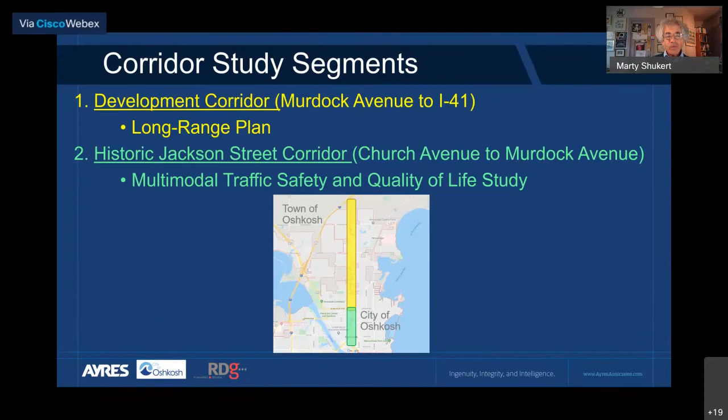In this study, we did a rather extensive level of discovery and economic analysis as well. As you know, the North Jackson Corridor is a real hybrid. It has two segments of significant development south of Packer, and then adjacent to the county park north of Snell, including the North Park neighborhoods. So we start out looking at existing land use. The areas in between, effectively north of County Road Y and between Packer and Snell, are really much more of a blank canvas right now. And a lot of the development ideas focus on those, whereas the built-up parts are a bit more incremental.

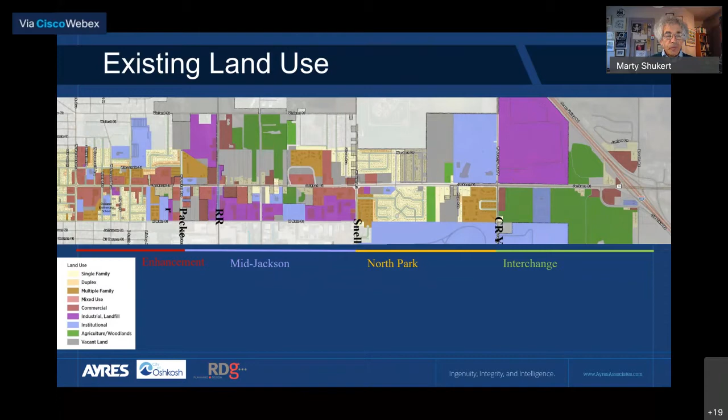Next slide, please. This simply shows the concepts included in the current 2018 comprehensive plan that identify these unbuilt or undeveloped areas, for the most part, that are not public facilities, as various kinds of mixed use. In other words, it's up to us to figure out what those mixed uses are. And so we get into a little bit more greater level of detail than that.

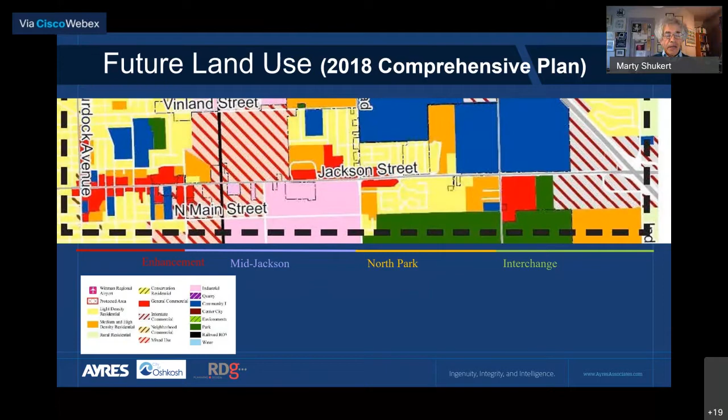Next slide. One of the components of the study included what we refer to as a visual listening or visual preference survey, where we showed people a series of images, cued what those images were about, and asked participants, of which we had about 150, to respond favorably or unfavorably about what they were seeing. These are the images that received the top ratings, and we can derive certain conclusions from these: a street character that includes landscaping and pedestrian or bicycle access, with a rather clean and multimodal look; the ability to get across streets relatively safely and easily; development character that is 2 and 3 story in scale, somewhat what we sometimes refer to as urban/suburban in scale, not strip commercial, but mixed uses; and a sense of gateways as well, of having urban design features that mark out specific places and areas along the corridor.

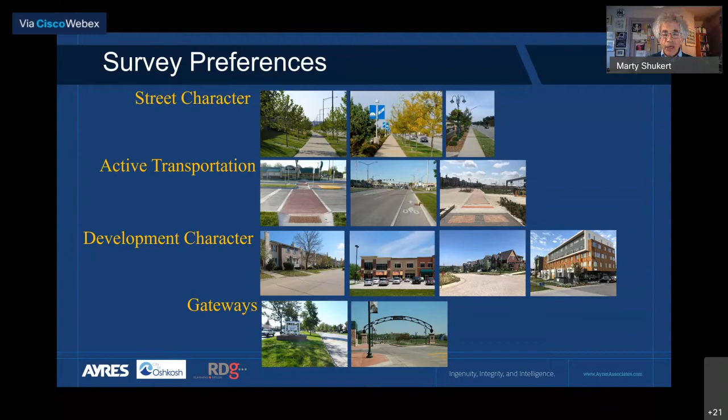So within the limitations of this kind of very long range plan, we tried to reflect these preferences in the overall concept. Next slide, please.

We're suggesting in this study, which does not rise to the level of the current RFQ that's out for a more complete housing study, that we will absorb or generate a need for about 150 to 160 units per year in the overall city over a 10-year period, and then we can project that onto a 20-year period as well. That's significant in terms of looking at the amount of housing that we're suggesting in the corridor and its consistency with what the markets are telling us.

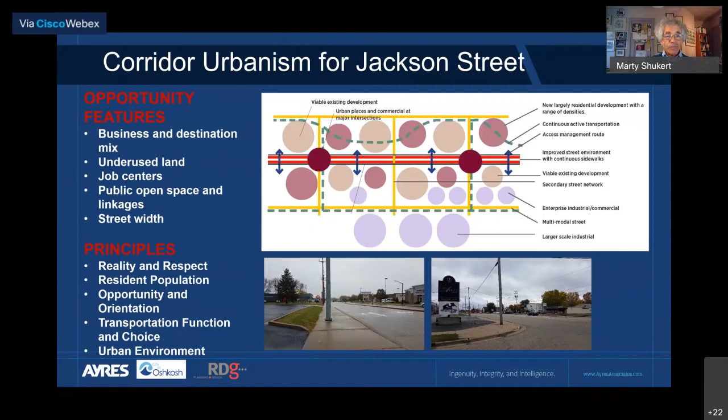So now we get into the planning itself, that there are certain trends that are leading us to conclusions. One is moderate population growth that will give us a city of about 74,000 within a 20-year time frame. A declining medium and long-term demand for commercial space. We really don't see the trends that we've experienced in retail reversing. And so commercial development in terms of the retail perspective is very much strategic and limited.

We have the distinctive presence of major job centers and industrial development along the eastern edge of our study area, evolving transportation preferences that include a growing demand for more sustainable transportation, as well as pedestrian access in local areas and bicycle access as well. And finally, an increased demand for greater land efficiency, for not wasting land on parking, for example, that's unnecessary, and trying to get the biggest bang for our buck of infrastructure and development as we possibly can.

Our strategies to deal with these include a good deal of residential mixing densities and mixing land uses horizontally rather than vertically. Many times people have been proposing residential development over commercial or retail, which is producing a lot of vacant retail space. We're suggesting a mixed use concept, but one that mixes uses horizontally and makes the relationship between commercial and residential development very permeable and organic.

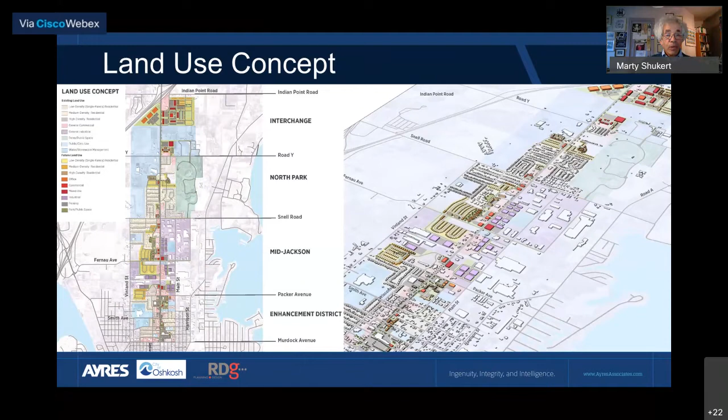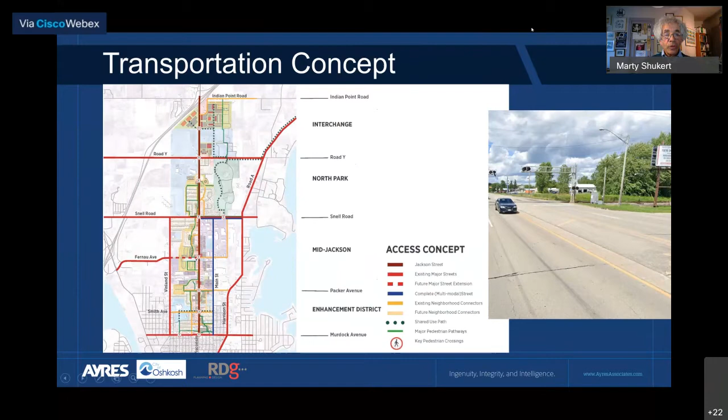Next slide, please. So now as we look in, this shows the overall transportation concept. We'll get into that on a segment by segment consideration.

You'll see in the document detailed plans both for transportation and land use that are annotated. We think a picture can be worth a lot of paragraphs and words that point the way to different ideas and recommendations along the corridor. The major land use features here are some infill residential development north of Fairacres Center and extending Packer Avenue to take advantage of some open land and residential possibilities.

There's a significant number of enhancement ideas that include an improved greenway and pedestrian way along the street, and better off-corridor bicycle connections as well, which you'll see in the next slide dealing with transportation improvements.

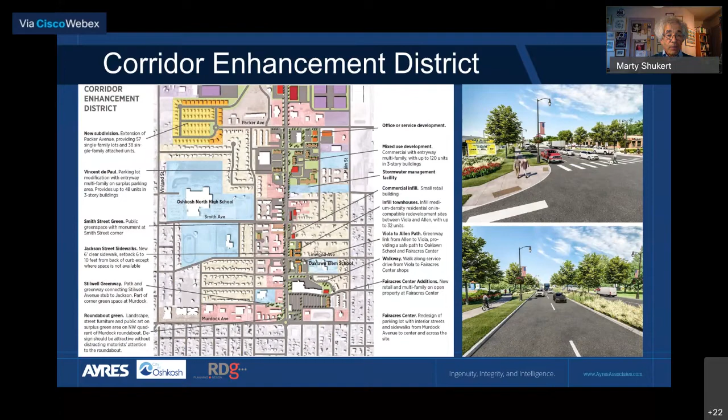We did a little bit closer look at Fairacres Center that provides ways of improving pedestrian and bicycle access into the center through interior streets. Right now, it's a little bit sketchy to walk through parking lots to get into the center, but there's better connectivity both to Murdock and to North Jackson, as well as to the neighborhoods to the north. That connectivity is a very important element of the entire scheme.

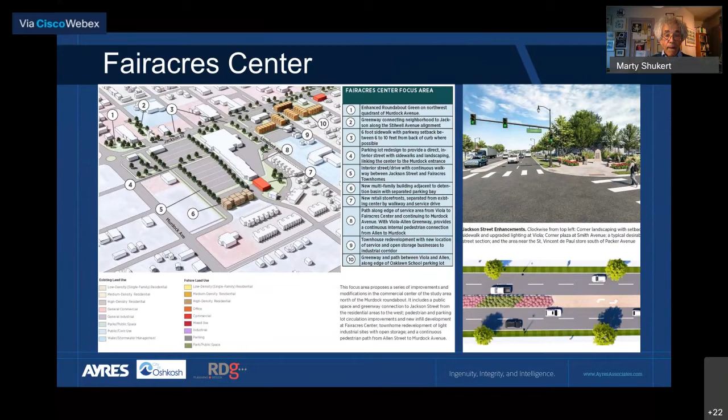The transportation concept focuses on better pedestrian facilities, both from the main bikeway corridor along Smith Avenue, and improved pedestrian crossings at Packer and Smith to the high school and to the west side of the street.

As well as improved sidewalks and pedestrian connectivity, both on the main corridor and off it along the Wisconsin Avenue alignment.

There's also some infill medium density housing on vacant sites and a greenway that helps to connect neighborhoods to Oaklawn School on the east side of the street. We're also proposing an eventual connection of Geneva Street that really helps connectivity and opens up some other industrial and business development opportunities between Main and North Jackson.

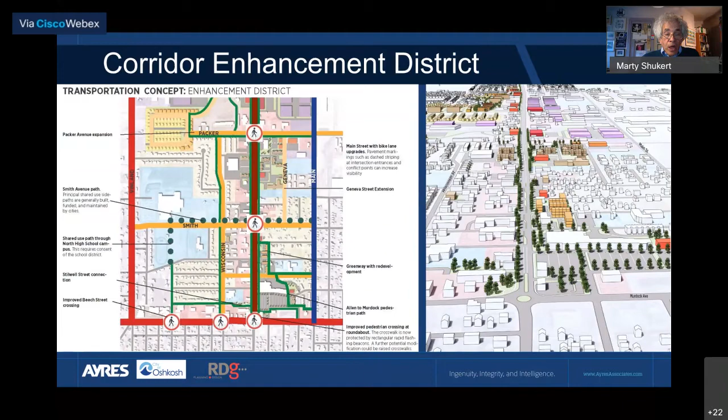Then, as we get to Mid-Jackson, the land use concept really gets to be very residential, with concepts for plats that we've laid out here. Not that people will necessarily build them exactly like this, but it presents ideas.

Some industrial and enterprise development along the railroad corridor, the extension of Fernau. Respect for the need for storm drainage and storm water management as well, and importantly, the development of connections that you'll see in the transportation concept.

You'll also see on the east side of Jackson that we are suggesting opportunities for smaller scale business startup and flex building uses. Again, complementing what's there, but providing a type of development that is often very much in demand, but not always very much accommodated within contemporary settings.

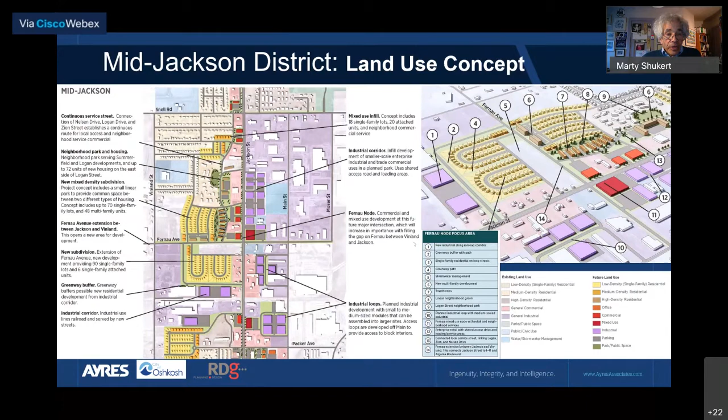You'll notice as well here in the transportation concept that supports this, the idea of using secondary access as well as pedestrian facilities along the main line of the street.

In this case, linking up the loose ends of Logan Drive to provide what's effectively a backage or rearage road between Snell and a mismarked Fernau Street that shouldn't say Snell and is actually corrected in the document.

That is a way of providing more comfortable local access that is multimodal and can be in a lot of ways more comfortable than trying to force pedestrian and bicycle traffic onto a major arterial. Main Street remains the primary north-south bikeway with its bike facilities.

And then through a better connection into the county park that is going to be online with the Snell Road project to be able to provide multimodality on the east side as well.

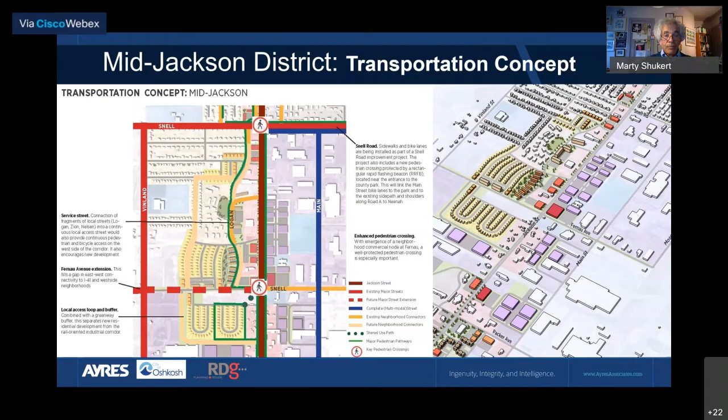So now we come to the North Park area where there are some residential infill opportunities, some service commercial, but the big news or big proposal here involves connectivity among neighborhoods and into Winnebago County Park.

This is probably a good point, because this is the last place where we have major residential development, to talk a little bit about how this is consistent with markets.

We're proposing an opportunity here at full build out, consider that to be 20 years or 2040 population, of a capacity of about 1,200 units, with a relatively even distribution of single family, medium density that is attached, townhouse, various kinds of medium density settings, and multifamily, adding up to about 1,200 units.

So that is effectively a third of the city's total housing demand over a 20-year period, which we think is a pretty reasonable number to assign to this specific amenity-rich development area.

So it's not all up here, but if we imagined about a third of the housing geography being developed along this North Oshkosh corridor, that feels about right and pretty consistent with what an overall housing and comprehensive plan for the city winds up showing.

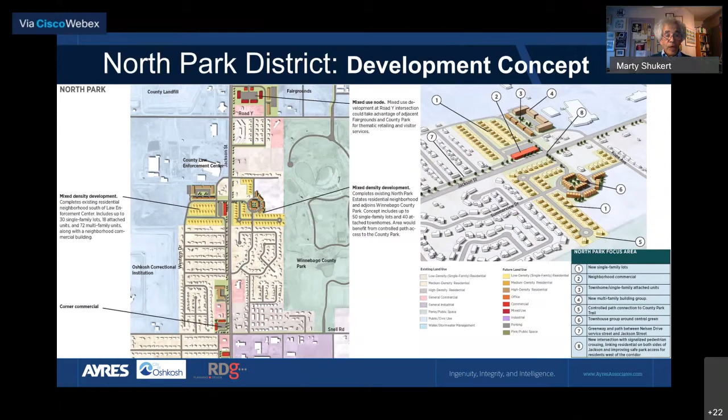So here you can see the extension of the secondary systems, as well as a significant central access into the county park with its trail and bike facilities completed between Snell and County Road Y, and then as a side path back over to the North Jackson main line.

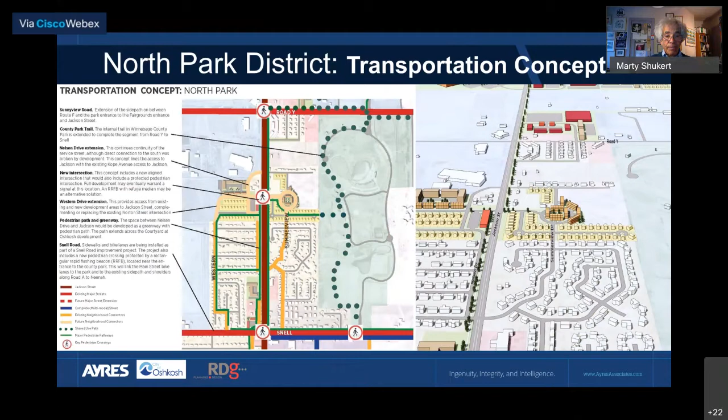Next slide. And then finally, we come to the concept for the I-41 interchange that envisions an office park and office related uses, lodging, assuming that someday we'll all be able to travel again.

I'm optimistic about that, and with that, commercial and office development surrounded again by new residential growth south of Indian Point that's designed to mix densities.

And to provide something that we think is significant, and we know the county did as well in our conversations with them, and that is shared use pathway connections to and through the county fairgrounds, where there are definitely strong visions of how to use that property in a more complete and year-round way.

The next slide will then show the transportation concept for this part of the corridor. So next slide, please. There we go.

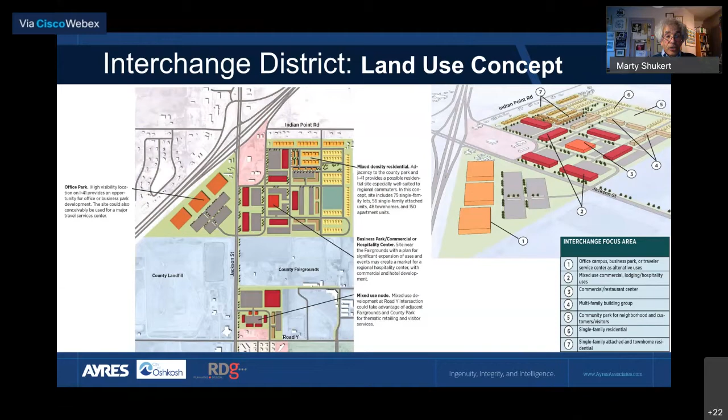So you can see the shared use path extending through the fairgrounds and then to the north as far as Indian Point, and pedestrian connectivity in this part of the development area as well.

So it is a long range vision, but we think one that is realistic, that looks at North Jackson in a contextual way. So with that, I will.

I think that's probably the last slide. We'll stop my monologue. It's a ton of material to put into 25 minutes, but hopefully I've done that well, and it will pique your interest in terms of looking at and reading through the final draft document that I know you all have access to. So with that, I'll stop and take any questions that you might have.

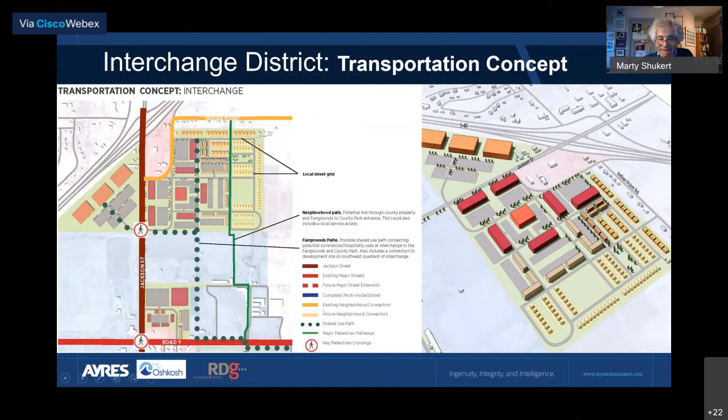But the short-term connections, within the next 5 years, involve the connection of Fernau from North Jackson to Vinland, the beginning of the corridor enhancement program, and beginning to fill some of the service road gaps farther north. We know there are projects like Snell Road that are online as well. The improvement of sidewalks and sidewalk continuity in the area south of Packer will also be a phase one or short-term improvement. So those are some of the ways to begin the project, dealing with the built-up areas, and then as development takes place and builds on that momentum, it moves off into the medium term as well.

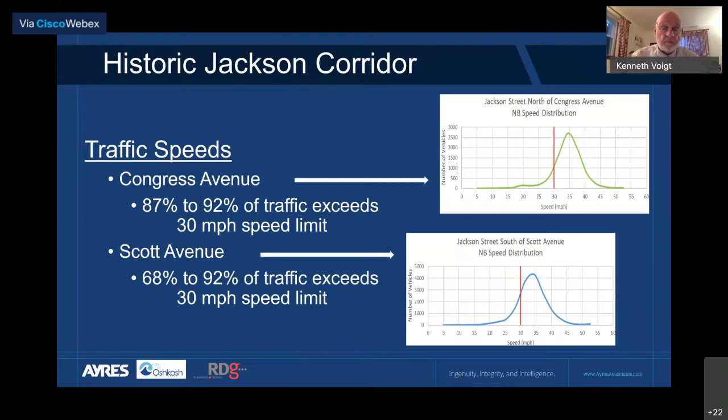Safety, a critical concern always, is what kind of crashes are there, collisions, and what the patterns are. 2016 was the highest year for crashes along this segment of the roadway. There were 75. The typical crash patterns, not really surprising with a 4-lane roadway, included left turns, some rear-end crashes as people stop to slow down and make a left or right turn. There's no turn bays for any of that, so cars can't get out of the way. And then just changing lanes or sideswiping cars in the adjacent lane.

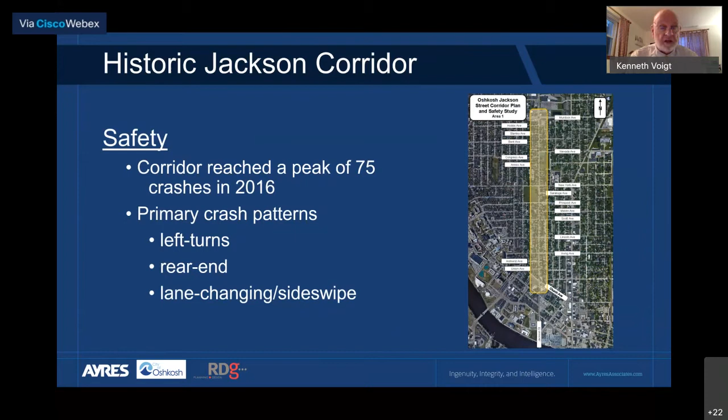The next slide shows the highest crash intersections. Murdock had 16 crashes per year, and we also show a rate there in parentheses, 1.56 per million entering vehicles at the intersection. I'll talk about that a little further. New York Avenue had 13 crashes per year, a rate of 2.04, the highest rate. And then Irving Avenue with 6 crashes per year.

After turns were restricted at New York Avenue, that 13 crashes per year was reduced to 5 crashes over a 12-month period. So that was an effective way of dealing with some of the left turn crash patterns that were out there.

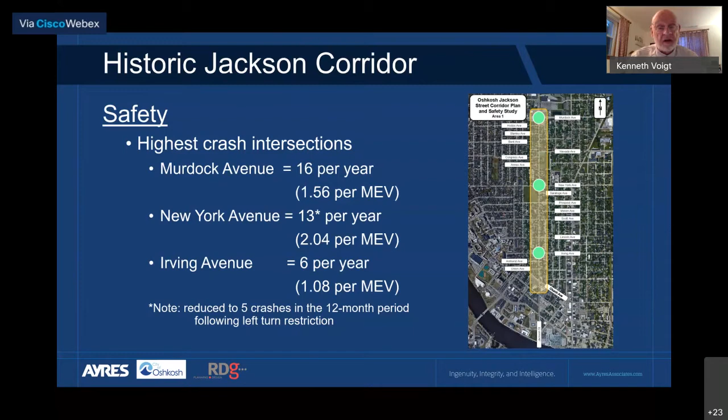So what I'd like to share, and this is kind of the telling part of how people feel about the corridor, I categorize these over those 3 sets of meetings. There was a fair amount of consistency in comments. And what were the top 10? It's like David Letterman's top 10 public meeting comments.

Pedestrian safety overwhelmingly had the highest number of comments. Pedestrians feel unsafe on the sidewalks adjacent to the speeding traffic that we measured out there, a lack of marked crosswalks, and bus stops are also people stops, so people using the bus have to be able to cross the street. And then you always look at schools and parks as generators as well.

Concern about safety at the Nevada Avenue intersection, traffic and pedestrians generated by the new school proposal that I understand may be on a referendum, and the Murdock roundabout as far as pedestrians crossing at some of the approaches. Again, as Marty indicated, a need for sidewalks throughout the corridor. You can see the bus stops and park crosswalk comments, and then in the Nevada school zone area. So there's a lot of concern about pedestrian activity and their safety as well.

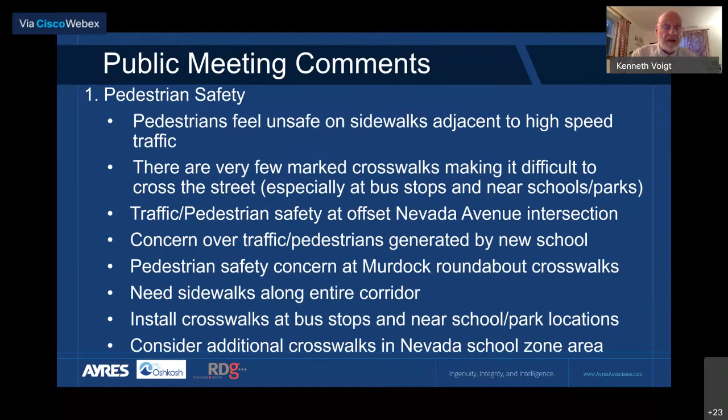There you see the speeding. Some of the suggestions were to consider using traffic taming tools to reduce the speeds. And then a question came up, well, how about putting parking on the outside lanes to slow traffic? Again, residents reported difficulty on the 4-lane roadway exiting their driveways because of the higher speed, roadway noise, and the need for some street lighting improvement, which is fundamentally a pedestrian enhancement as well.

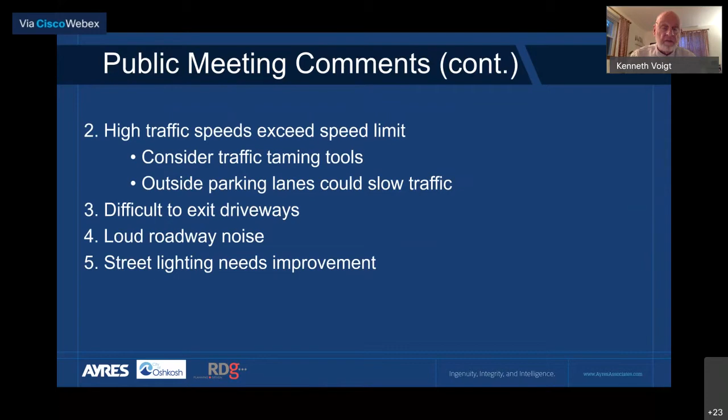Snow, and we're going to be getting into that. With the sidewalks adjacent to the curb, adjacent to the traffic lanes, there's really not any area to store snow during the winter time periods. And then if one of our improvements looked at bump outs at the several intersections, who's going to take charge of snow removal at the crosswalks so that pedestrians can use those crosswalks?

Potential backups of traffic behind a bus stop. Redesign the street is one of our alternatives, and will emergency vehicles be able to go through the corridor? And then another consideration to look at rerouting Highway 41 as an alternative route when there's congestion or crashes on the 41 route.

Number 10, we're going to talk a little bit ahead of time about roadway redesign because that was part of our charge. The area south of Murdock, as you come out of the roundabout, has 2 lanes heading southbound, and how do you transition into a redesign that has 1 lane heading southbound? Driveway safety in that area or transition area.

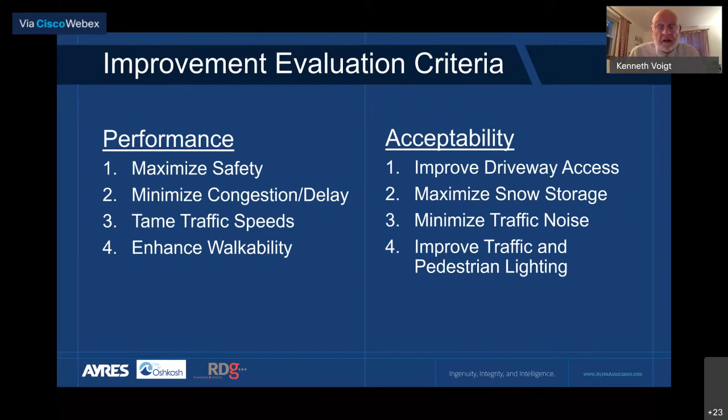So we've been talking about some of these roadway improvement options. What are they? So we'll go into some details here. The next slide lists them - I call the first one the do nothing option: maintain the existing street cross section from Church all the way up to Murdock as a 4-lane roadway.

And then we talked a little bit, tipped our hat to some redesign options, and that's part of our charge in this study. A full redesign all the way from Church Avenue to Hobbs, and we've got a couple of drawings that'll show it. TWLTL means two-way left turn lane. And then a partial redesign, not carrying it all the way from Church to Hobbs, but using the New York Avenue intersection as the transition, and then from New York Avenue to Murdock maintaining a 4-lane cross section.

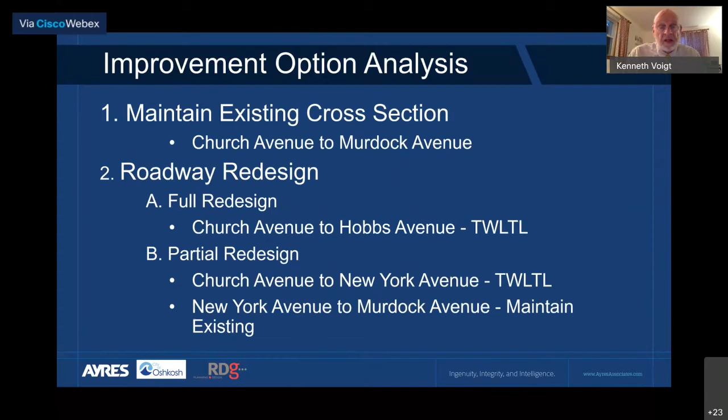So let's take a look at option 1, maintain the existing cross section. You can see here that the existing road from curb to curb is 45 feet wide, and we've got between 60 to 66 feet of right of way, with 2 travel lanes in each direction. That's what is out there right now, and that's what we were analyzing.

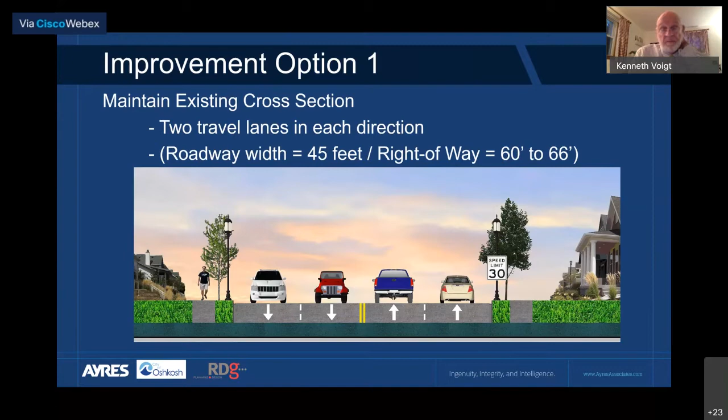So one way to address some of the pedestrian concerns and the speeding concerns is to tame traffic speeds. An effective tool has been shown to install speed feedback signs. They're radar units, not the ones on the trailer with wheels that you move around, but a permanent sign. You'll see later on a picture of what they look like. You can probably envision it, where it's got the speed limit on it.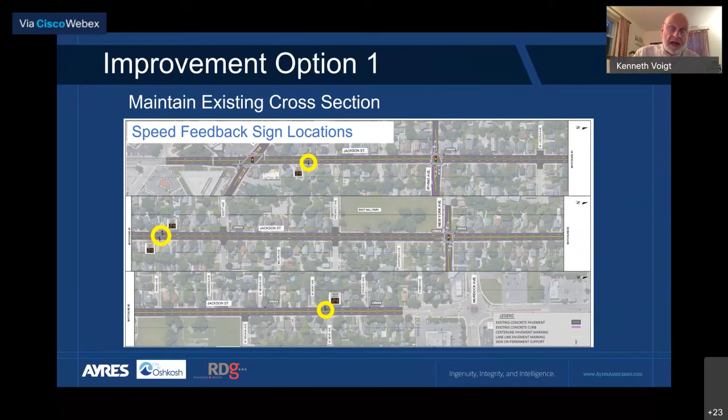There really isn't a whole lot more we can do to that route. It has what I kind of define as a highway feel to it, as opposed to an urban street feel, because of the 4 lanes of concrete. We maximize a benefit of having extra capacity on the roadway to minimize delays, particularly when there might be use of Highway 41 as an alternative route. And it minimizes backups at our signalized intersections because we got 2 lanes at the intersection as opposed to 1.

There are drawbacks, though. It's a marginal impact on traffic speeds. It's a marginal impact on safety because you still have the side swipe type crashes. You've got the difficulty of pedestrians crossing 45 feet of roadway with active traffic on it. It doesn't change our ability to store snow and really doesn't have a major impact on reducing noise throughout the corridor.

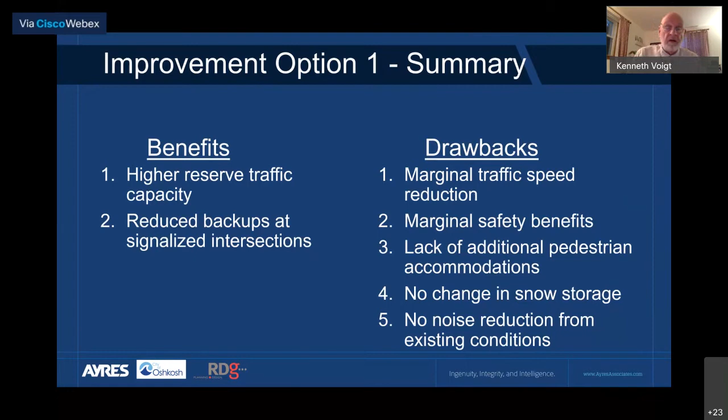So the next slide describes our two improvement options. The full roadway redesign, we call it the full TWLTL, it's called a twiddle. One travel lane in each direction with a center two-way left turn lane.

You can see that outside those two vehicles, one in each direction, there's a buffer area of about 5 feet between that and the curb. And that's how you start drawing some of the benefits as well as some of the traffic taming. Having one lane in each direction has a tendency, particularly with 11-foot lanes, to reduce traffic speeds, again, by 3 to 5 miles per hour, sometimes 7. And it takes the left turning vehicles out of a live traffic lane. That's that rear end crash problem if they're going into a driveway or at an intersection.

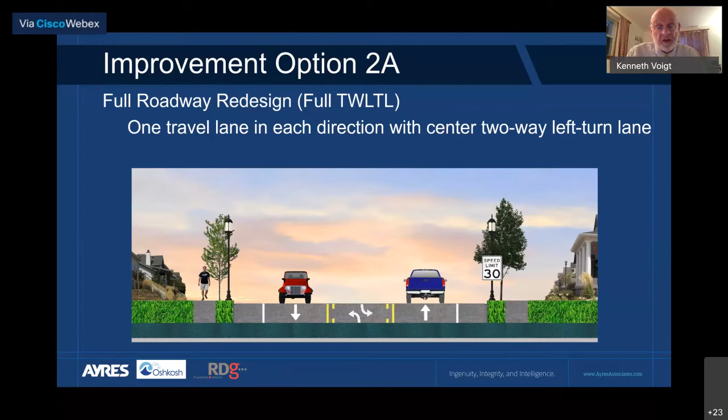So the full option, we're recommending the speed feedback signs you saw before, and I got a graphic that'll show that. Additional crosswalks, the use of rapid flashing beacons, which you've probably seen in other areas of the city, and then corner bump outs. We've got a couple of diagrams here so you can visualize that.

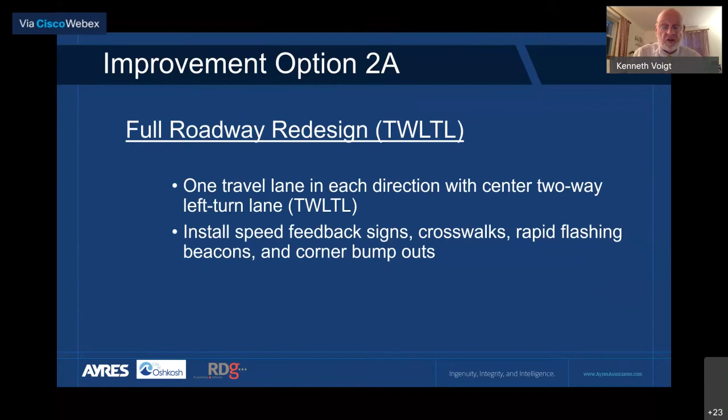So a two-way left turn lane, it gets extended all the way up to Stanley. You can see the transition area between Stanley and as you head up toward the roundabout.

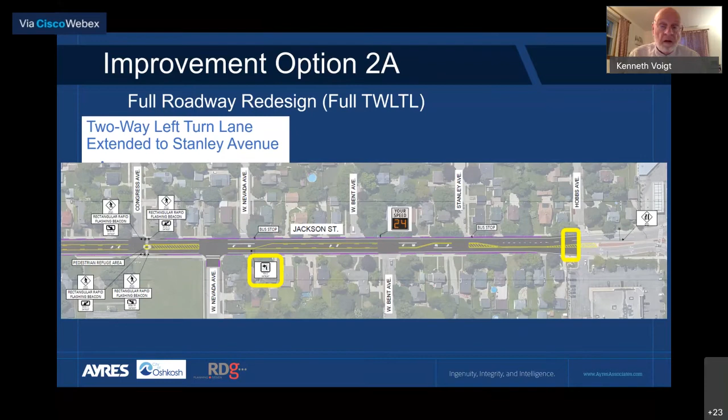Those are the three speed feedback signs that we've been recommending along the corridor. Again, a little more effective because it's only one lane in each direction that are viewing it. A lot of times they get blocked when there's two cars, one in the left-hand lane, one in the right-hand lane, and the car in the right-hand lane blocks the vision of the speed feedback sign.

And then left turns at the signalized intersections. You can see the treatment here at Irving. Taking the left turns out of the through traffic lane, again, another safety improvement, and accommodating that traffic mobility through the corridor.

We're recommending high visibility crosswalks. These are what we call continental design. They're the most visible to sight impaired pedestrians as well as to motorists on the roadway itself as they approach an intersection. We're almost developing a cadence there, but these intersection locations are selected to connect origins and destinations on both sides of the roadway.

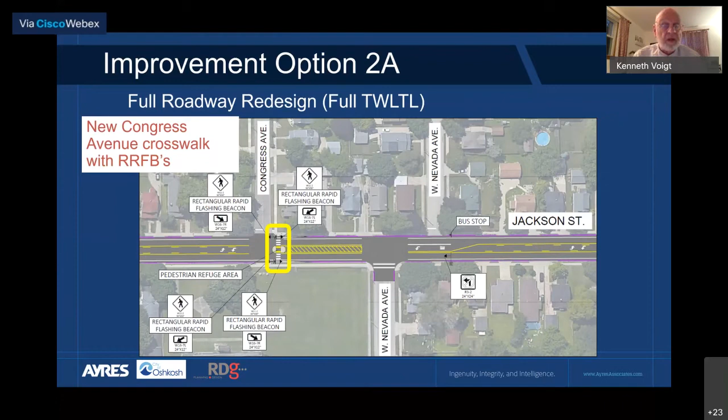And this is the intersection where we talked about having the rapid flashing beacons. You can see its ability to service the school traffic as well, and the pedestrians. Next slide.

So we kind of flip the benefits and the drawbacks. It does reduce traffic speeds, all the studies we've seen and areas we've applied these types of traffic taming tools. I'd add that individually, a traffic taming tool like a speed feedback sign gives you a certain expected reduction in speed. But if you do a collective set of them, there's a synergy between them, and you get a bigger impact on the ability to reduce those traffic speeds with the bump outs and the two-way left turn lane, reduced roadway width, and so on. It enhances safety for pedestrians as well as cars.

It minimizes, pretty hard to do, the side swipe. It also reduces rear end crashes, effectively improves pedestrian crossings at the street. With that 5-foot buffer, it does give you some snow storage area. And because we're reducing traffic speeds, it also reduces noise.

The one drawback is instead of having 2 lanes in each direction going through the intersections, having 1 lane and then a left turn lane, it does reduce some of the reserve capacity. Our operation analysis indicates that intersections still operate at level of service C, which is what you design intersections for. But if we have a sudden bump in traffic, its ability to accommodate that goes toward the capacity of the roadway itself design. Next slide.

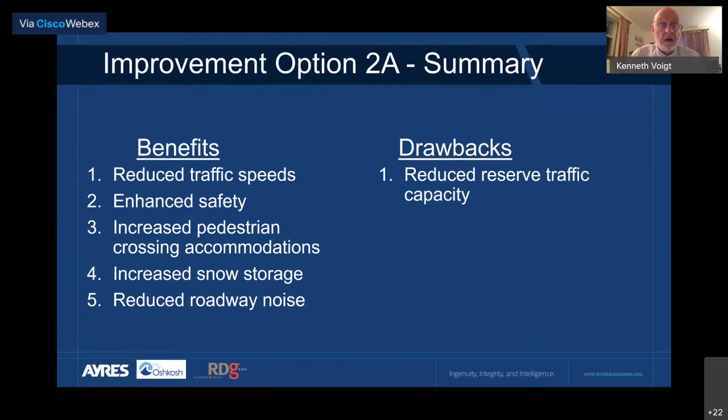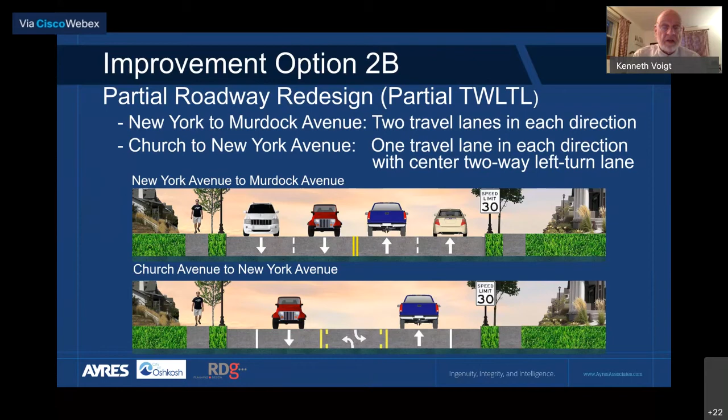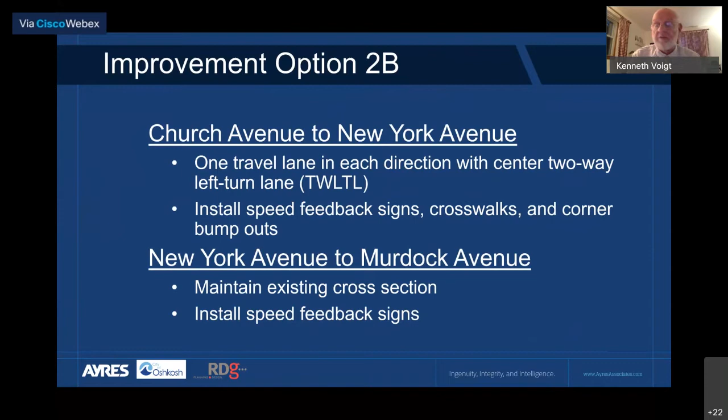From Church to New York Avenue, again, speed feedback signs, ability for crosswalks and for corner bump outs. You remember Congress is where we had the rapid flashing beacons and a crosswalk. We can't really put that on a 4-lane cross section from a safety perspective for pedestrians, so that one's eliminated under this. And then from New York to Murdock, maintain the existing cross section, but we still have the speed feedback sign there. So it's a little bit of a hybrid, if you will.

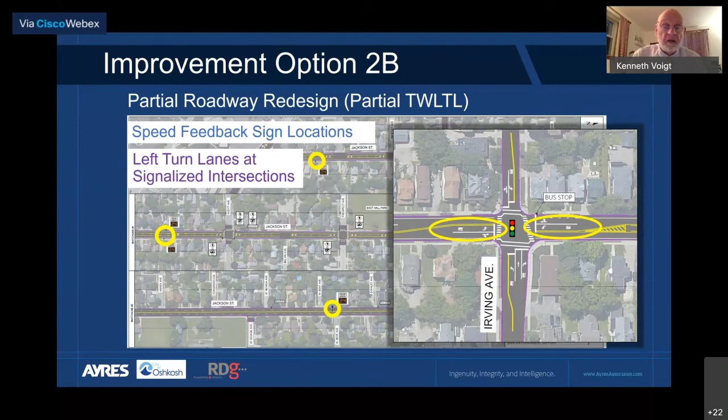Here are the locations of the speed feedback signs, you've seen that before. Next. And again, doing the left turn lanes at the signalized intersections. Next slide.

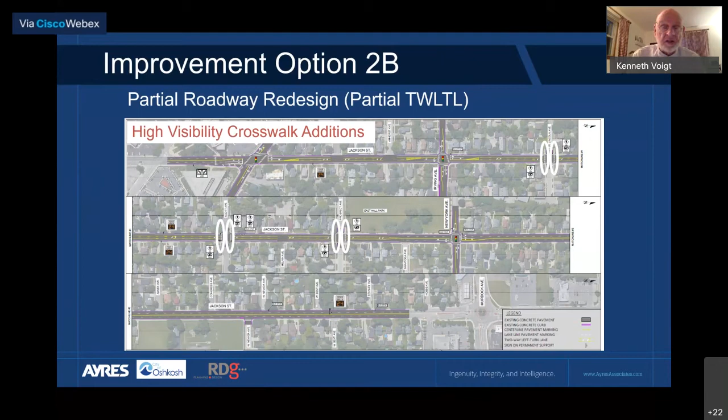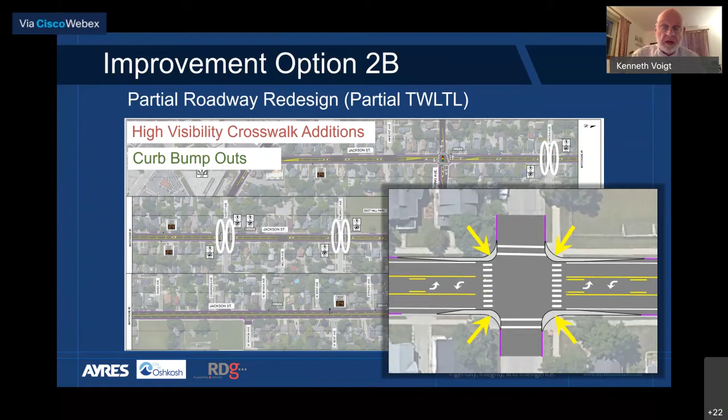There are the high visibility crosswalk locations. Next slide. And the bump outs that could still occur and are recommended at the crosswalk locations for our intersections here. Next slide, please.

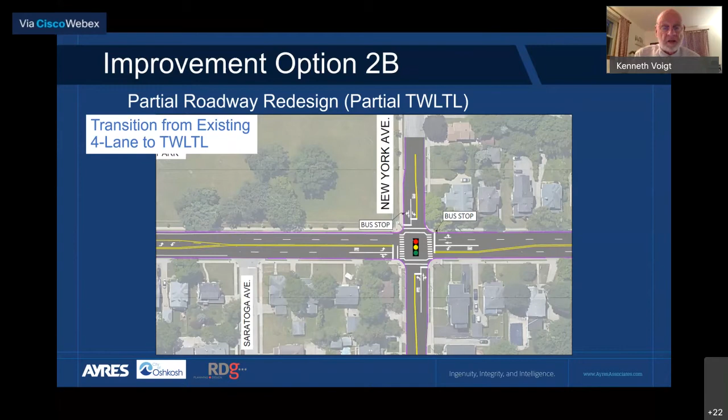And here's the transition that we mentioned at New York Avenue, where you can see southbound 2 lanes, and as they get past New York, they merge into 1 lane. You can see northbound, we've got the through lane and then a designated left turn lane. So the through lane becomes a single lane through the intersection, and then it widens out to 2 lanes as it heads toward the roundabout. Next slide.

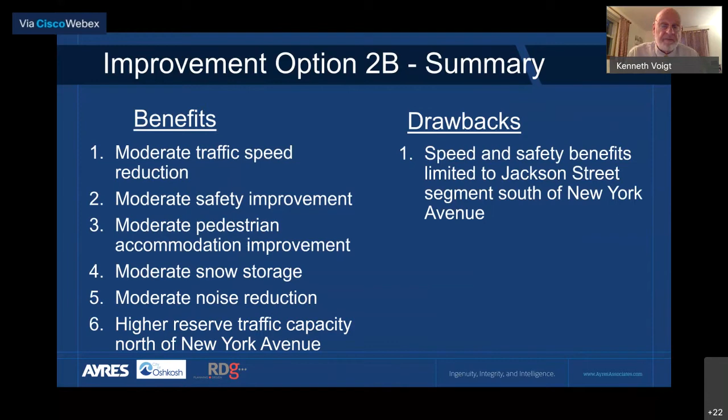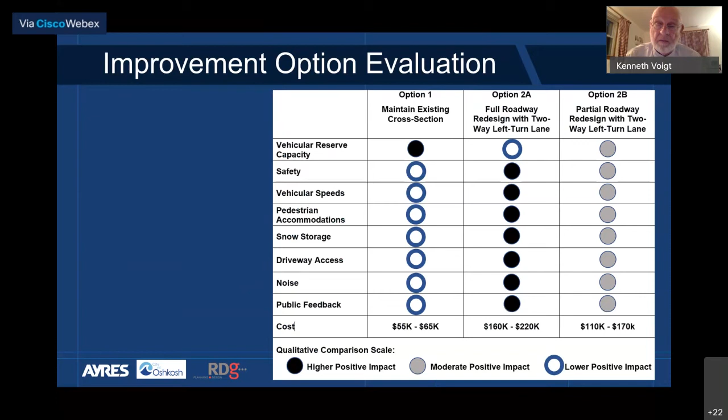I'd also note at the bottom row you see the cost estimates. If we maintain the existing cross section, it's $55,000 to $65,000, not a whole lot of change. The full roadway option with a continuous two-way left turn lane is $160,000 to $220,000. Option 2B is slightly less, at $110,000 to $170,000, to make those improvements on that section.

At our meetings we had some questions that we tried to address, so I put some graphics together here because you may have similar questions.

A lot of people asked, can this roadway operate with one lane each direction and a center turn lane? These are examples from around the country of roadways with this redesign, showing daily traffic volumes. Keep in mind our traffic volumes range between 10,000 and 17,000 with some minor growth added. You can see some of the criteria and national standards.

I'll highlight Wisconsin DOT first, which has a figure of 17,500. The Federal Highway Administration has a handbook specifically on roadway redesigns where they say 20,000 — above that you have to do extra engineering studies. You can also see the National Association of City Transportation Officials and the Oshkosh Pedestrian Bicycle Master Plan figures in the 20 to 25 to 30,000 vehicles per day range, so they can carry the volumes currently on the roadway and those projected.

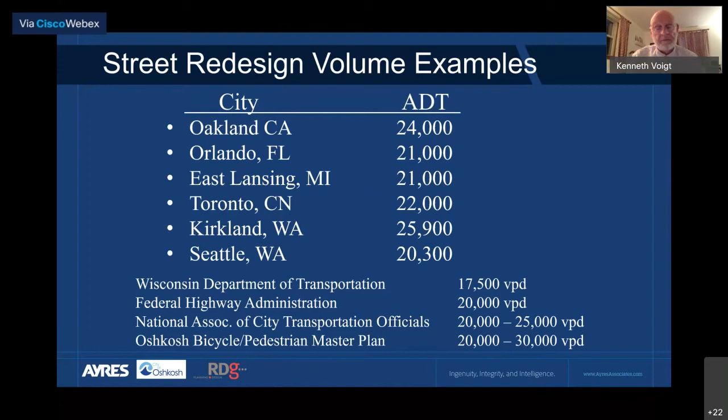Next slide — here are some trade-offs between a three-lane redesign and the existing four-lane roadway. Left turns create blind spots with oncoming traffic, which is a safety issue. On the left turn from Jackson Street, in the exhibit on the right, you see that visibility of oncoming traffic is much clearer for vehicles making left turns — they have more distance, in other words.

Left turns from side streets: on the left-hand square, with two lanes of traffic, visibility is obstructed by the second car in the center lane for a car making a left turn out of the cross street. On the three-lane design, there's no blind spot created by the oncoming car — you see the first car, making it easier to turn out.

For pedestrians, this is one reason we didn't recommend pedestrian crossings on the four-lane cross section. The car on the left-hand side, bottom image, really can't see a pedestrian in the crosswalk because that pedestrian is blocked by the car in the right-hand lane. You can also see a bus stop condition where the car in the left lane on a four-lane road can't see the pedestrian because the bus is blocking the view. This is a major safety concern on any four-lane roadway, particularly at the speeds we're experiencing here.

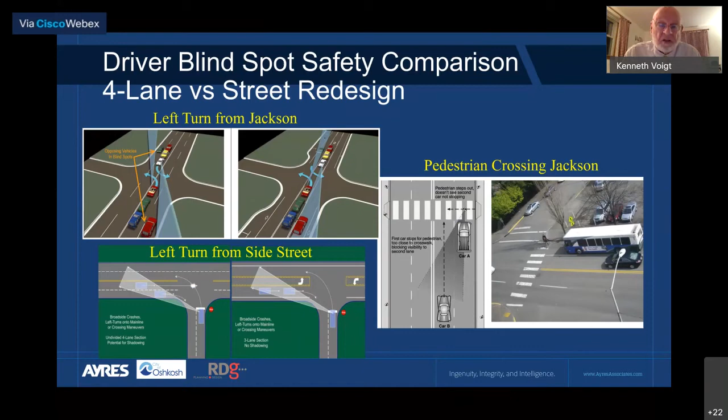Some examples of speed feedback signs. We're recommending, if we maintain a four-lane roadway under option 1, an overhead mounted speed feedback sign — the picture at the top is from Madison.

It's centered over both lanes so drivers can see it, whereas if it were on the right-hand side by the shoulder or curb, it'd be hard for the vehicle in the center lane to see. You can see the cost of that. Under the redesign, we're recommending a post-mount speed feedback sign, about half the cost of the overhead signs. The corner bump-outs are about $24,000 per intersection.

I don't have a picture of that, but I wanted to highlight the rapid flashing beacon — the center set of photographs with the yellow pedestrian crossing. Between that diamond-shaped sign and the arrow beneath it are rapid flashing yellow lights that are push-button activated by a pedestrian. You can also see the pedestrian hybrid beacon — if there's a desire and demand for an actual pedestrian crosswalk on the four-lane roadway, the city of Milwaukee has implemented these. It's a hybrid beacon, a bit like a railroad crossing, and you have to have it on both sides of the street for both directions of traffic.

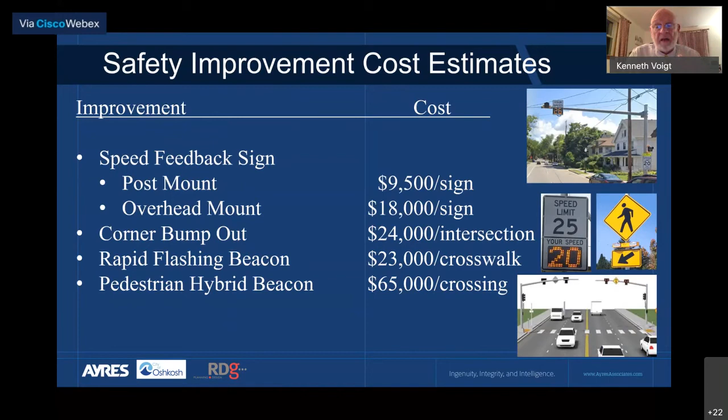And it's a set of red lights that flash alternately when the pedestrian hits the button to cross the street, telling the motorist to stop, as opposed to the yellow flashing beacons, which under our current state law means yield to pedestrians, not stop for pedestrians. So that gives you the idea of the cost and what some of those improvements look like.

Our recommendation, as you could probably guess from our evaluation, is option 2A, the full roadway redesign. It reduces speeds the best, enhances corridor safety, and improves walkability with added crosswalks and a buffer zone. A lot of pedestrians won't walk on a sidewalk alongside a live traffic lane without some kind of buffer. It also increases snow storage, improves driveway access, and results in an improved quality of life for the residential neighborhood along this part of the corridor.

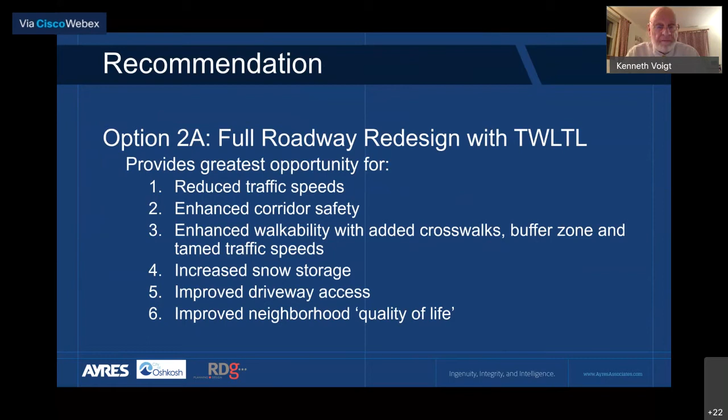This closes out the presentation. In November there's a set of meetings where official action will be taken and discussed, and then it's scheduled for December 8th for the Common Council meeting. That's our tentative schedule. For additional questions, I'll answer the chat questions now. I think we're on schedule pretty good right now. Other questions can be directed to Alexa at the city.

So we've got some chat questions. I don't know if the one I see right now is the first one, but it suggests adding small park-like residential settings while reducing cross traffic. Intersections with roads like Stanley, Saratoga, Nevada, west of Jackson, and Union could all be prime candidates for such features. I'm a little confused by that, I think I might be missing part of it.

Let me chime in here. Let's go back to one we missed when you were going over the different options. Lori Palmieri asked about this option, I don't remember which one you were on, with the buffer area. It was the first one. So for option 1, would this buffer area be perceived as a pullover spot?